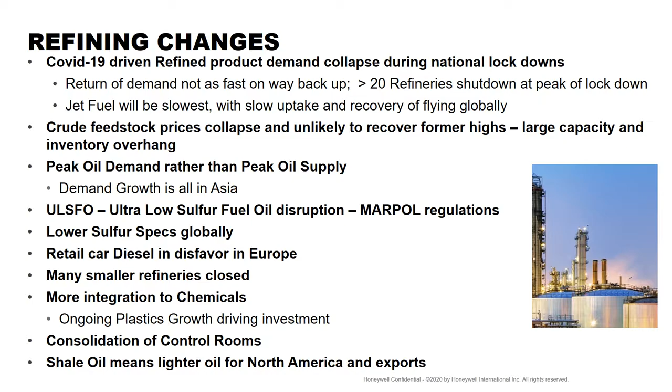In a more recent scenario, we've seen more petrochemical integration within refinery operations, with more focus on petrochemical production, and the yield pattern shifting towards petrochemicals from fuels for some operations. And that has been an ongoing focus for a number of different sites. And we've seen investments in this way, not just in the Middle East, but in the US and, of course, in the Far East.

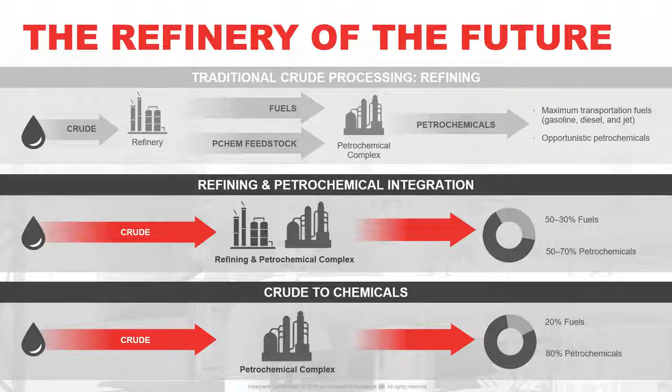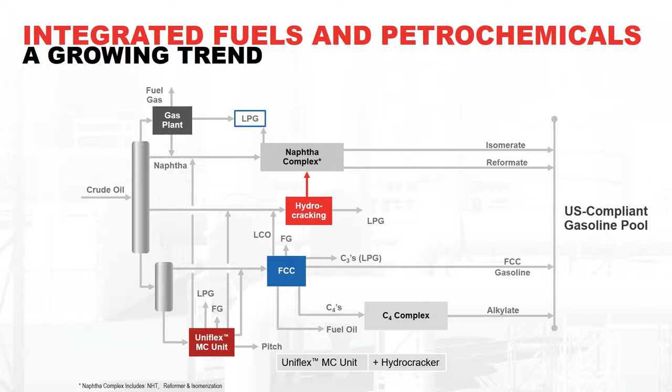The addition of petrochemicals capabilities to have a positive impact on the yield pattern and the profitability and market focus of a refinery can be done in a number of different ways in different scenarios as fits a refinery's current situation. Examples here include maybe at the bottom end from vacuum bottoms, adding a heavy feed hydrocracker such as a UOP Uniflex to produce mid-distillates that can then be used in the distillate hydrotreater or FCC, or add a hydrocracker directly on middle distillates to improve quality, but also provide some extra naphtha for the naphtha complex.

And then from the naphtha complex, adding aromatics conversion capability to focus on production of paraxylene maybe as a precursor for an external polyester plant to use as feeds.

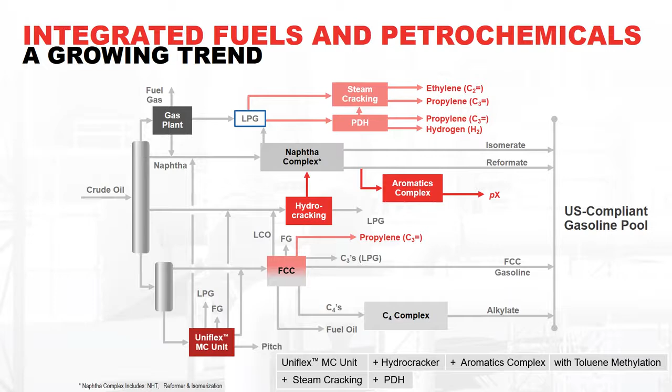And on the top end, to look at use of the LPG coming from the crude units, but also maybe from the FCC units to provide feed for steam cracking to produce ethylene or propylene, and any propane to be used in a propane dehydrogenation unit such as UOP Oleflex to maximize production of on-purpose propylene, while producing hydrogen for other units such as the hydrocrackers and so on.

So for the refinery of the future, we've talked so far about the integration with petrochemicals and how investments can be focused to change the yield pattern and change the financial fortunes of a given site. But really the key trends that I want to focus on for the remaining time we have is to talk about refining as a flexible operation and the connected refinery, being able to apply technologies to maximize the ability of the refinery to react to changing market conditions, to changing conditions inside the refinery, as process units perhaps have performance issues, and still be able to react in the best way possible.

Both the flexibility and the connectedness of the refinery are the end point or the results of ongoing technology developments from the prior decades, from this decade, and ongoing into the future, including, for example, in the top box, the use of virtualization, as Honeywell was the first to virtualize a control system, the use of virtual engineering platform, VEP, to provide a very flexible remote community for engineering automation projects to end users, to engineering contractors, to licensors.

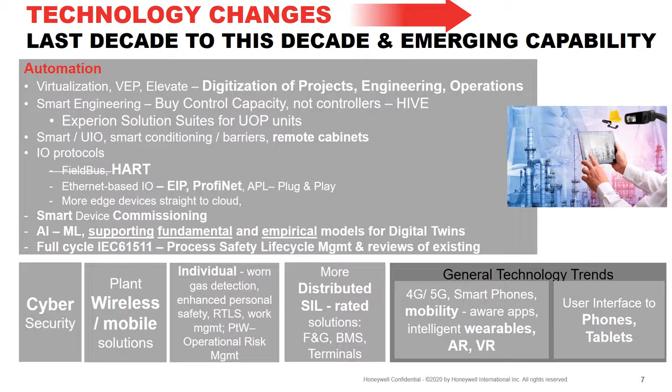Much more distributed safety-related applications, as you see here in the middle, with logic solvers certainly being able to be put out in the field, close to operations; small scale safety applications are much more effective to put in place than they were before. And then the tracking of individual performance, individual behavior, individual work in the plants through use of personal gas detection, real-time location systems, permit to work, and providing really the foundation for overall real-time operational risk management. These form the compendium, if you want, of all the technologies that have an impact on current trends.

So with our objective of having a connected and flexible refinery, there are at the core a number of operational objectives that we need to keep in mind. That begins inside the gates, operating safely under all conditions, being able to maximize net cash margins as a financial objective, but at the same time maintaining run length, since refinery units run for a certain number of years before requiring major maintenance, and the longer those run lengths are, the better the financial performance. But at the same time, maintaining quality products and not having product quality giveaway, making just enough quality to be on spec, but not more.

While eliminating and minimizing unplanned downtime, since refineries are very high fixed cost operations, keeping the place running is key to ensuring a good performance. As well, planning and managing the capability of the refinery and sustainability over the long term is important, in the sense that it is not productive to do something that would be beneficial in the short term only for a short period of time, if at the same time it is at the expense of later processing difficulties in the refinery.

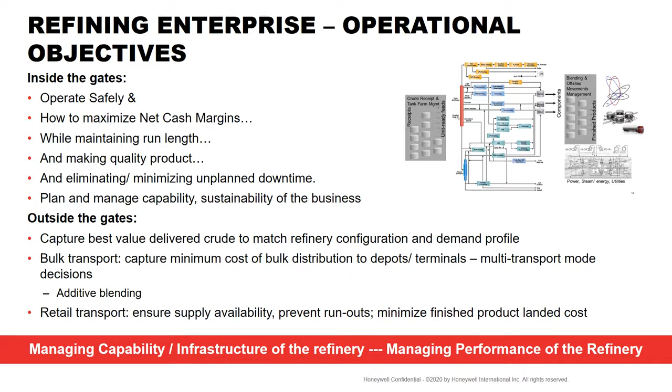And if there's, as we've talked until now about petrochemical integration, then there's the attention to all the logistics for loading and unloading petrochemical products into different kinds of tankers, rail cars, and so on as well. So taking all these together, the idea is to find a way to manage the capability and infrastructure of the refinery. On the one hand, manage the base asset as it is, keeping everything safe and running. On the other hand, manage the performance of the refinery to make sure that we can make our money back and be a sustainable business.

So as we examine a little bit more what it means to achieve flexibility and connectedness in a refinery, we've come to a conclusion that we need to manage the refinery capability, the base assets that we have, in a safe, consistent way, as well as to manage the performance of the overall assets in order to achieve our financial results.

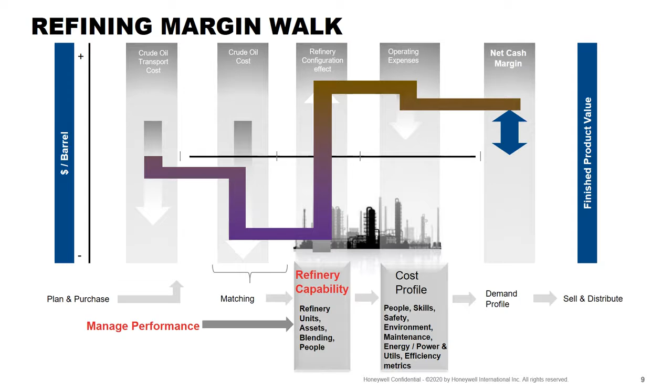For Honeywell Process Solutions, what this means is managing a number of different cost elements that come into play. The crude, when it has already been purchased and delivered, as we see in the left-hand box, begins to be taken in and processed, and then we start to transform the crude oil in the middle box and achieve higher value products at the expense of energy, people, maintenance and equipment, and so on. These are the operating expenses in the fourth box on the right, and then from that we achieve a net cash margin. So attention to all the different cost elements within an existing refinery becomes key to achieving performance.

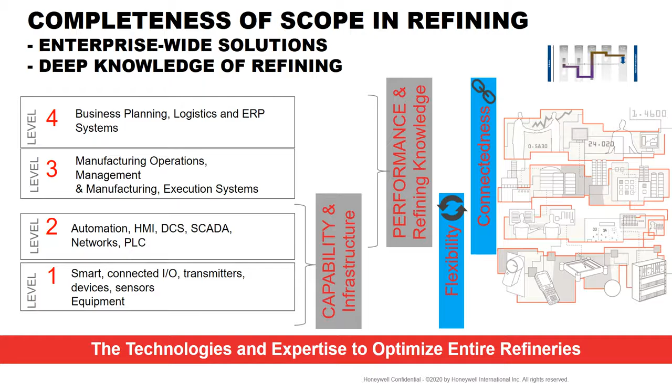And these tie together into our earlier stated concepts of flexibility and connectedness. So the connectedness itself is required, but the refining knowledge complements that in order to achieve final results for refineries. This overlap of capability and performance requirements to be in the best position to manage refineries is what has been so productively implemented in the Experion PKS platform, bringing together elements that you see across the bottom as regards to capability, and elements roughly around the top line related to performance. And we'll go through some of those in a little bit of detail now.

On the bottom left, process control and process safety, of course, for many years a core integral part of the Experion PKS platform. And also now, for many cases, implementation of elements such as catalyst regeneration, dryer regeneration, such as for UOP units, implemented directly in the controllers and integrated, maintained and managed in the same platform as well.

Integration of third-party packages as may be required for packages from OEMs, as well as loading activity in terminals, as well as integration of fire and gas devices for both buildings and process areas into safety-related applications.

The integration of CCTV cameras into Digital Video Manager as an integral part of Experion PKS has been used for many years by many customers, including for video that watches process areas, watches flares, and even from portable cameras watching maintenance operations for temporary purposes.

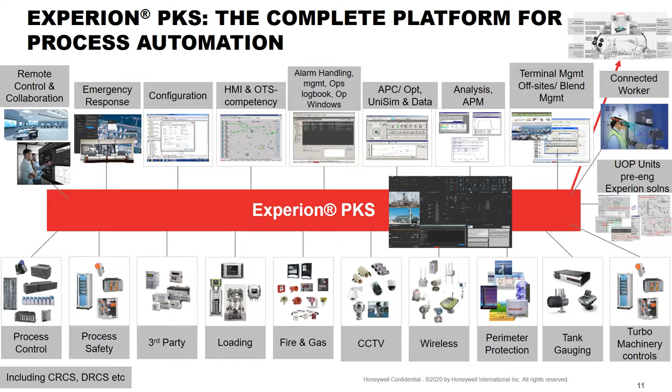If we take a look here at a functional view of what Honeywell's activity is and how the deep refining knowledge comes into play for providing performance for refineries, we have this particular view, beginning from the top.

The integration into SAP, which is critical for most businesses, of course, for which Honeywell has done a number of different deliveries, integrating from multiple different functions - from production, from maintenance, from terminals, from offsites, for example - and as well then production planning through LP management of refineries.

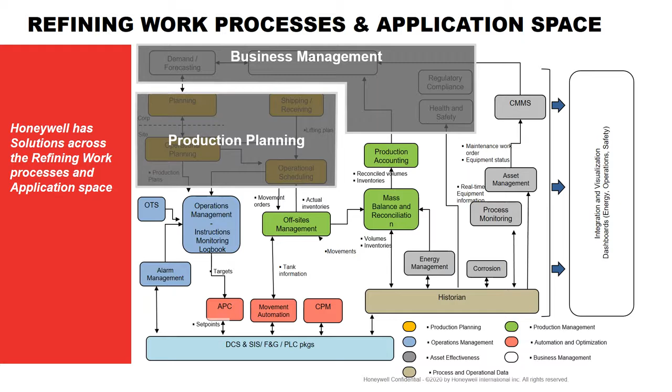The ability to provide overall models for shutdown planning, for optimization of seasonal variations in refinery production, for example, along with managing production on a day-to-day, month-to-month basis, providing the necessary reconciliation of data across the sites in a consistent way, without the thousands of spreadsheets that some other people use.

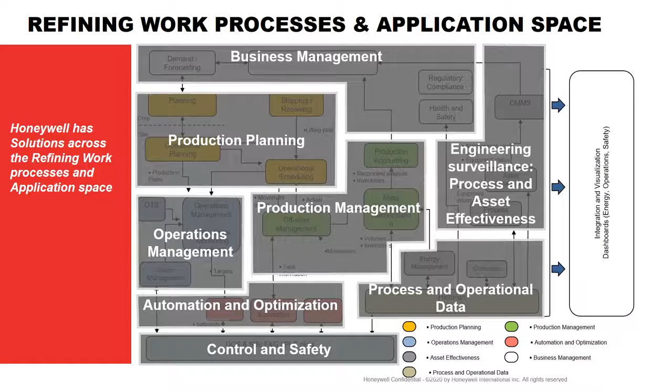And then managing operations, the hour-to-hour, minute-to-minute interactions of operators with the plant, providing logbook and experience capture, and of course the optimization and algorithm-focused ability to coordinate control across different units, along with the base control and safety. That gets complemented by process and operational data, focusing on operating capability and KPIs, and overall engineering surveillance, which you can see through the Forge platform, providing process and asset surveillance or effectiveness on the site, all driven by a common end user experience overall on the site.

Following this functional view, we can look at how things look when we are now able to provide connectivity to remote supports for refineries.

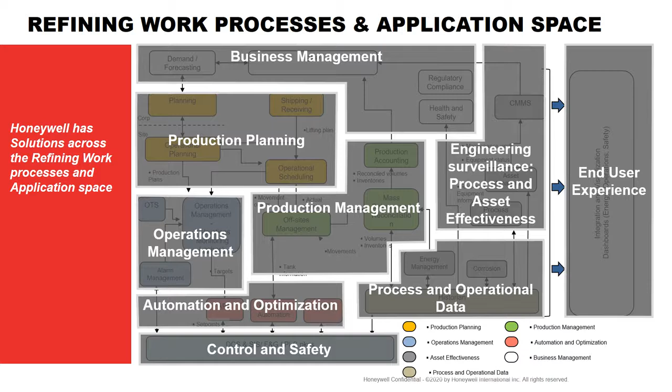We've seen that overall refinery success is dependent on managing both capability and performance, and that performance itself depends on both connectedness and deep refining knowledge.

The Honeywell Forge platform, Forge for Industrial, which you can see much more of elsewhere in HTF 2020, gives you here some examples of remote connectedness and therefore performance management at its best in the latest generation of Honeywell technology, providing the ability to do many of these functions either site-hosted or remotely hosted, whether site delivered or remotely delivered. Some examples could include process performance.

We have both our sister company UOP for their process units, and other licensors such as Wood for a delayed coker, providing remote support on our Forge platform for different process licenses they have in the field. The same platform is usable for asset performance management here in the top right.

As I said earlier, not only can we control rotating machinery at the base level in the controls, but we can also track their performance at the upper level, along with many other assets on the site.

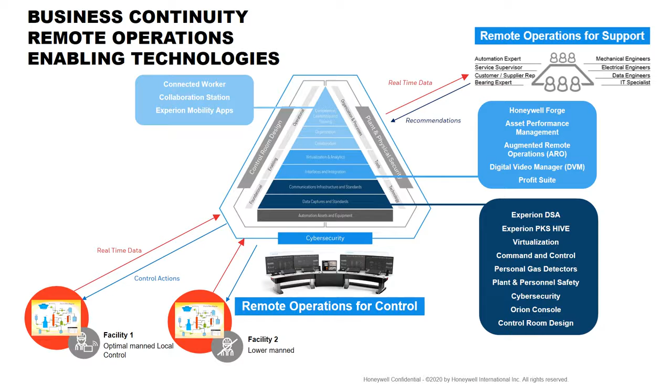These have driven a number of different initiatives in Honeywell to really focus on remote operations for control. We have a number of customers looking at this at the same time, and these could end up covering multiple different functionalities that customers may require to be performed remotely, whether from engineering or from operations directly.

So to summarize, we've looked at the refinery of the future and what it can focus on, how it can evolve. We've looked at aspects of petrochemical integration as affecting the asset base and the potential yield patterns for refineries in the future, as they focus perhaps less on fuels and more on petrochemical molecules. But much more in the rest of the presentation, we focused on this idea of connectedness and the flexibility of the refinery, both requiring to be addressed.

And we looked at how Honeywell, through managing both capability and performance in refineries, are able to use the connectedness to provide these added benefits to refiners into the future for their own successful operation.